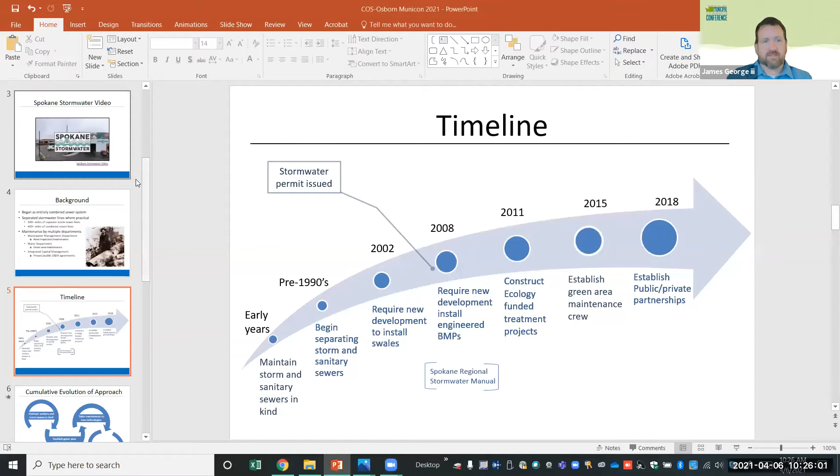So today's presentation, as Karen mentioned, is the organic evolution of a multi-departmental municipal O&M program. And I'm going to present a couple videos and a little PowerPoint sandwich in between the videos. And then as part of that PowerPoint sandwich, Taylor Hoffman-Ballard is going to present some work she's doing for the City of Spokane. It kind of ties it all together.

And so this is a lot of words for a short presentation that just wants to showcase where our municipal O&M program is at and how we got there. Because I think we're a little atypical in the municipal O&M program world. We kind of grew organically, in response to needs. That's how our program got developed.

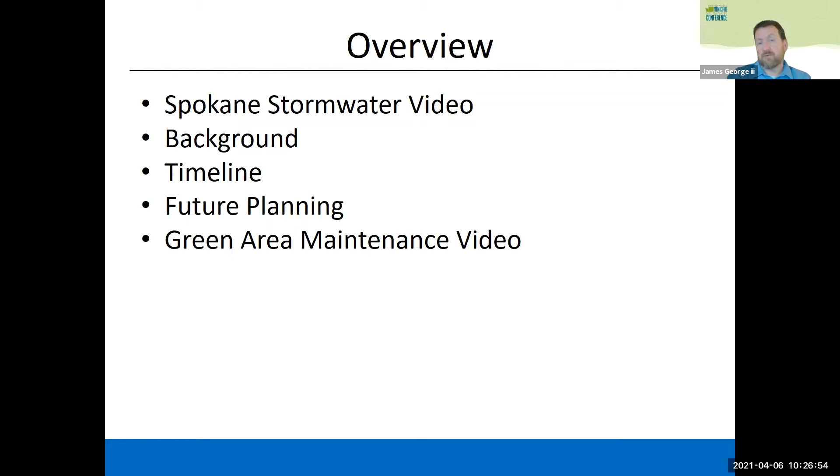As mentioned, we're going to have a video, a few very brief slides, and then another video. These videos were created as part of our public outreach campaign, but they do showcase our maintenance program pretty well in that they make our public aware of what we do and why we're doing it. So with that, we're going to start with a video right off the bat, and I'll see you guys when it's wrapped up.

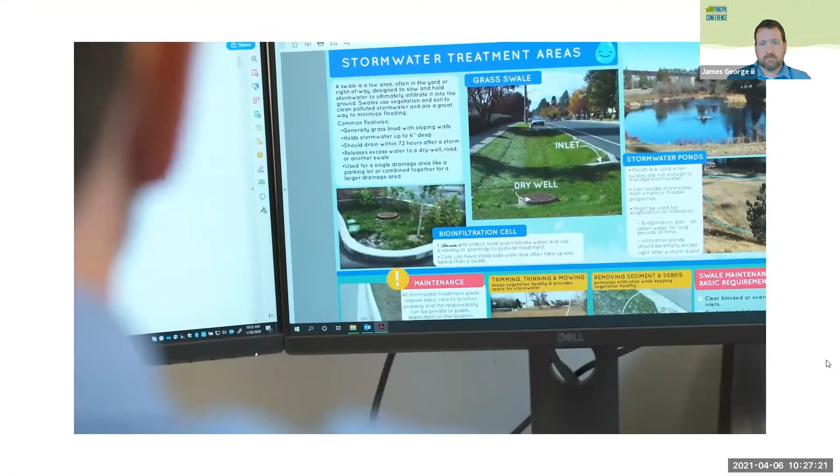We are responsible for all the wastewater, so that's the combined sewer system, the sanitary sewer system, and the stormwater system as well. The folks that work in the department here make sure that a packet of water, when it leaves the sky and hits the ground, is managed appropriately, and then it gets to the river as clean as possible. That's what this department does. We try to keep as many of the pollutants out as we can.

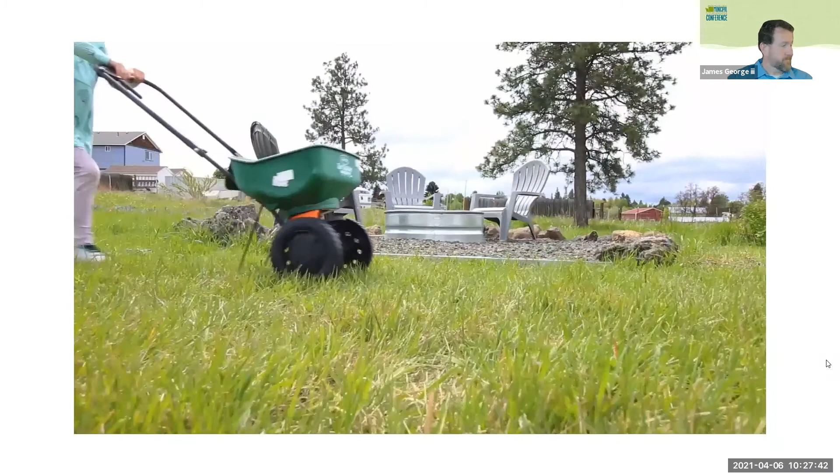Typical pollutants in an urban environment are things like metals that come off of worn tires and worn brakes, fuels, oils that are leaked from vehicles, pet waste, lawn chemicals like fertilizers or pesticides. Well, that stormwater comes by and it picks those things up and takes them with it. Anything that doesn't fall out of the sky is considered a pollutant.

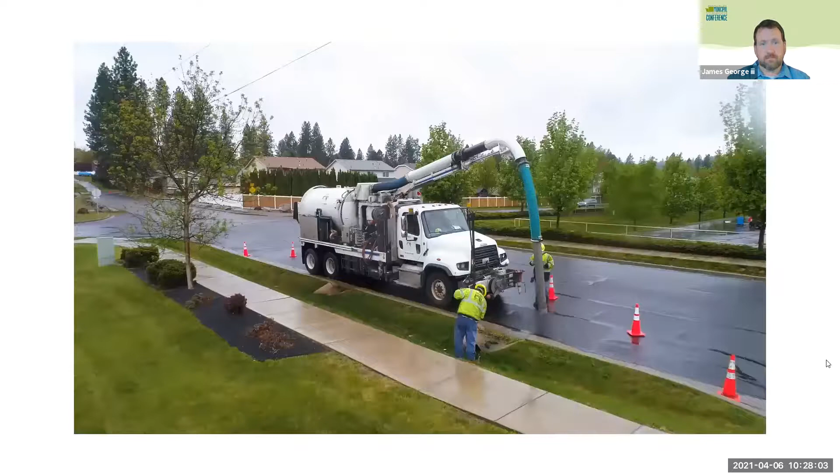And a lot of people don't realize that our aquifer in some places is only 28 feet deep. And that goes to the river. Well, the river interchanges with the aquifer at least 7 times. We're out doing what we're doing so it can help keep the river clean. I do think it's a very big and very important thing that we do day in and day out. And most people don't think about how well we protect the system.

Our stormwater system consists of 3 different elements. A combined system where they take the stormwater and mix it with the sewage, and so you see catch basins in the street. The separated storm system is one in which we have pipes that go to the river directly, and those have catch basins and grates and pipes. Then you have on-site, which is dry wells and grassy swales.

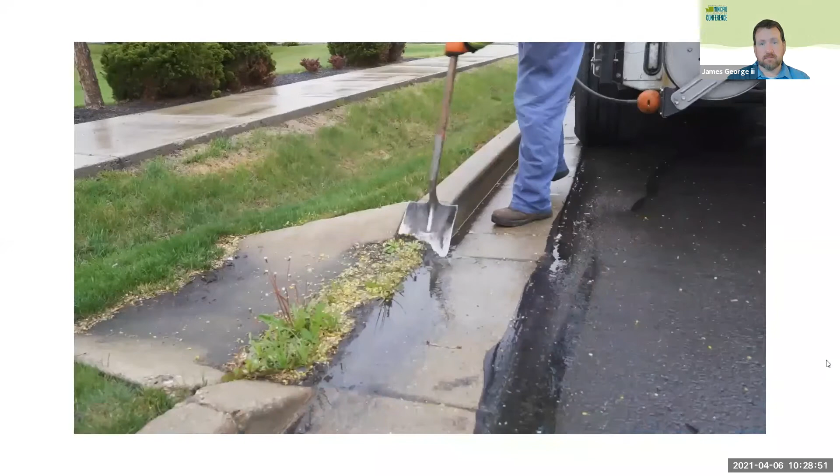A swale is a low-lying area. It's essentially a ditch that works for us. You can find them all over town. It allows stormwater to drain into it, and then the vegetation and the soil in the swale provide treatment for the stormwater to remove the phosphates, the metals, the oils and greases.

What is awesome about stormwater chemistry is that Mother Nature provided us the tools we need to treat stormwater. Vegetation and grasses and bushes and such, as well as the soil, the microbes in the soil and the soil itself, provide us the treatment that we need to remove the pollutants from stormwater.

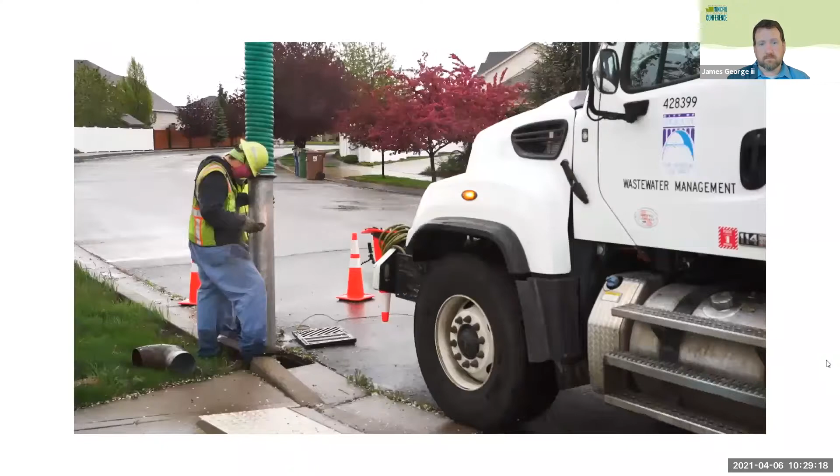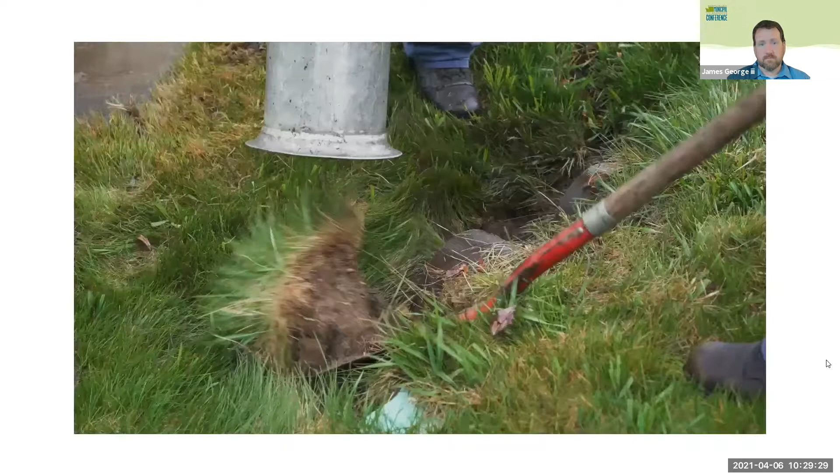We have just under 20,000 catch basins and dry wells within the system, within the city limits, that we're maintaining on a daily basis. The catch basins basically take the stormwater and put it in pipes that go either to the wastewater department, or a lot of them just go into the ground. On a normal day, we go out, we check to see what catch basins need to be cleaned. We check the depth of the debris.

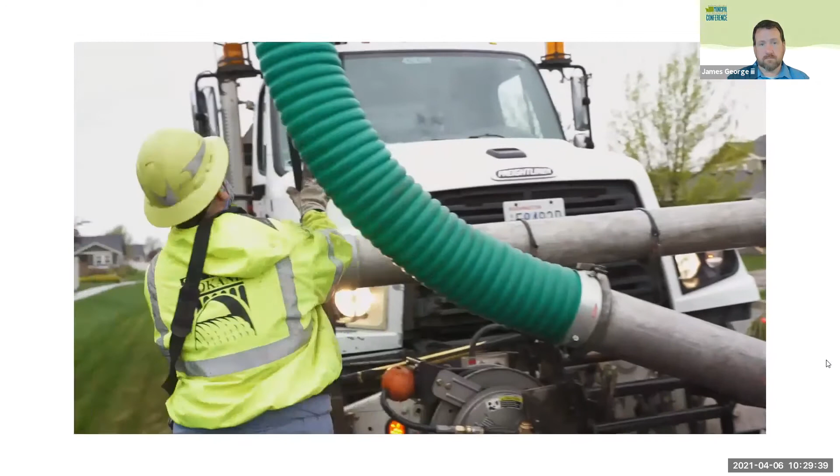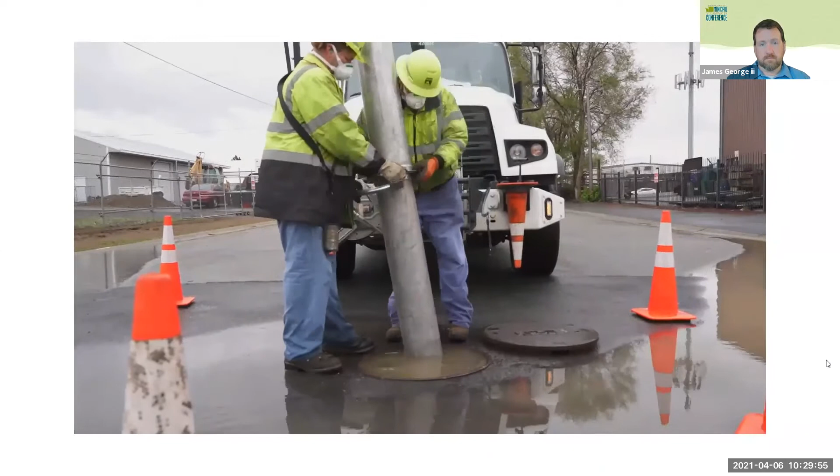One of us will operate the boom and suck the debris out. The other will use a jetter gun and spray out the sides, clean out the inlet pipe and the area around the catch basin, and make sure it looks better than when we got there. And then when there are storms, we go help out where the infrastructure isn't quite keeping up.

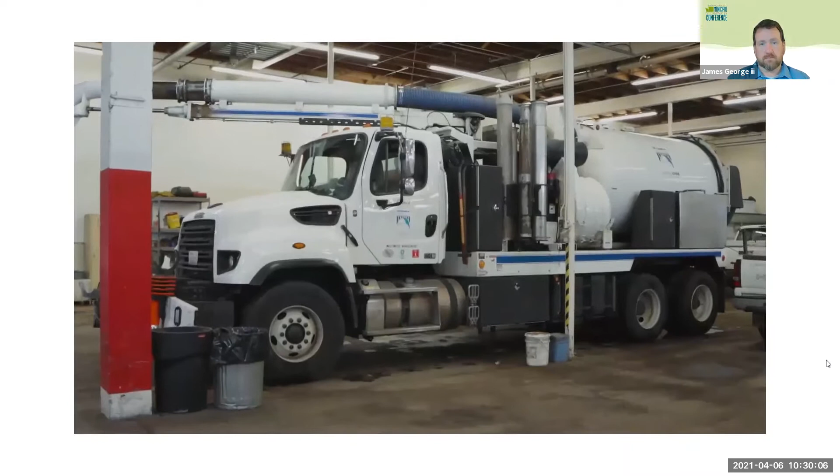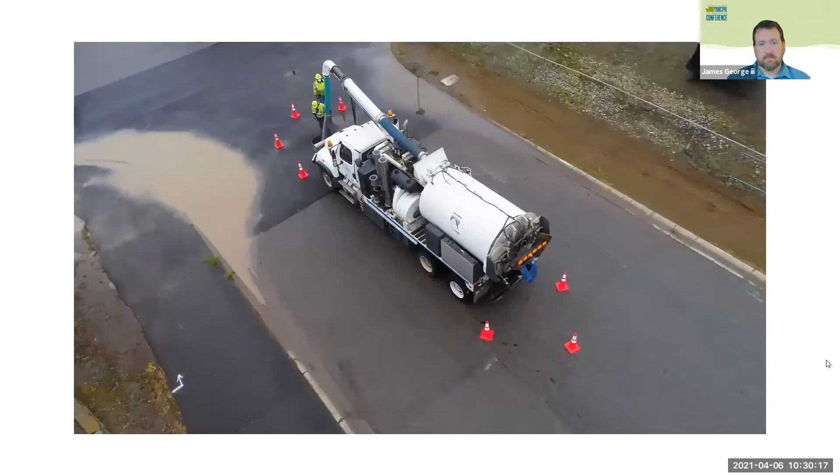That's when we get puddles that we have to go take care of, especially in the spring when the ground's frozen. Truck will hold about 2,200 gallons of water, and it'll fill up in about 4 minutes. Mother Nature rains too much, our pipes can't handle it. And we always get the question, why don't you just make them bigger? And then Mother Nature proves who's in charge, and they're still too small.

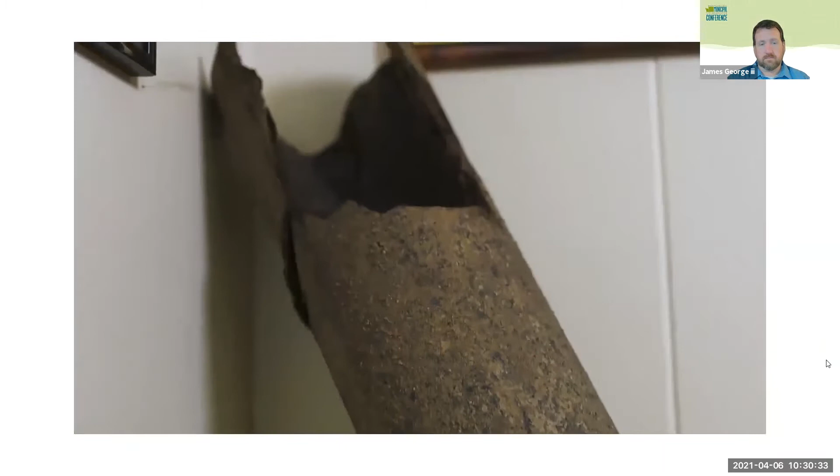We have over 850 miles of pipe on the sanitary side, and we have 350 miles worth of storm pipe systems. Pipes that are over 100 years old, some of them show signs of duress, and so we plan on what we're going to do to fix those. Come on.

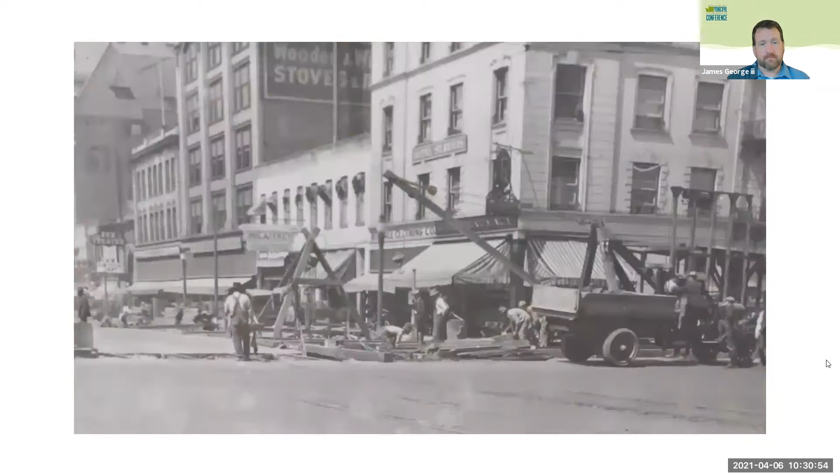My name is Mike Simmons, and I work for the city's wastewater division. I've worked for this department for almost 40 years. 30 years of that, I've operated a television van, video inspection system for inspecting pipes. In 1957, Spokane had a catastrophic failure of a sewer in an expensive neighborhood, and it cost over $2 million in the 50s to repair in 2 years.

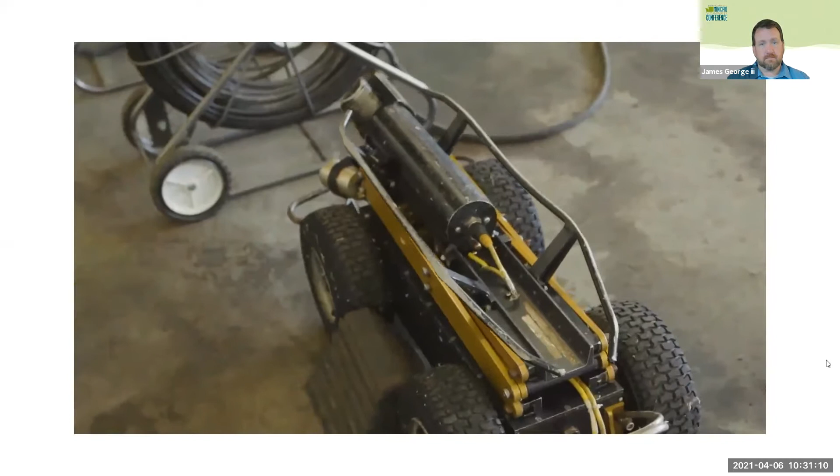So the City of Spokane began to look at ways of inspecting our pipes and knowing what we had in advance. The operation consists of introducing a camera into the sewer manhole and driving it through the pipe, watching it on television and observing the condition of it, logging observations, faults, roots, cracks, anything that might be in there, and making a full report of it in a video.

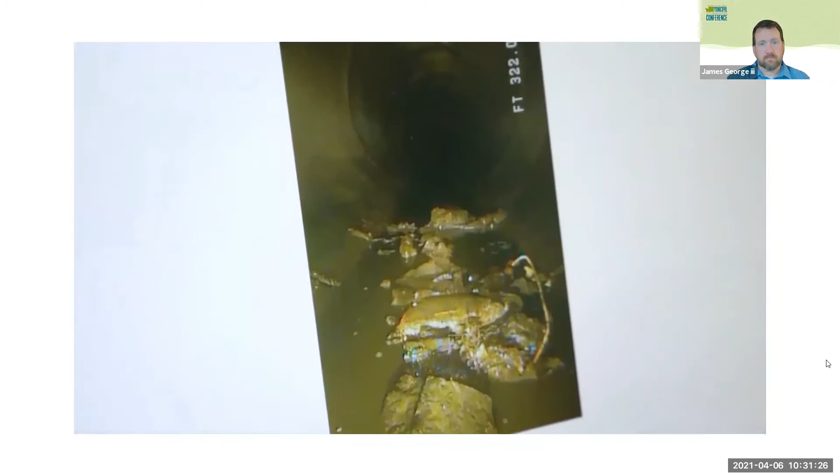These are some snapshots of some of the different pipe conditions that we've encountered over the years. This would be considered crushed pipe, almost a failure actually. We don't want them to get to this point. So the money that is spent on it is saved dozens of times over.

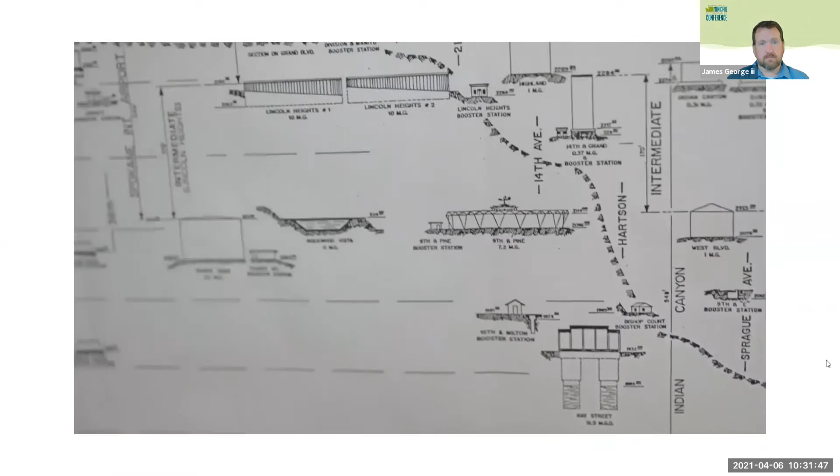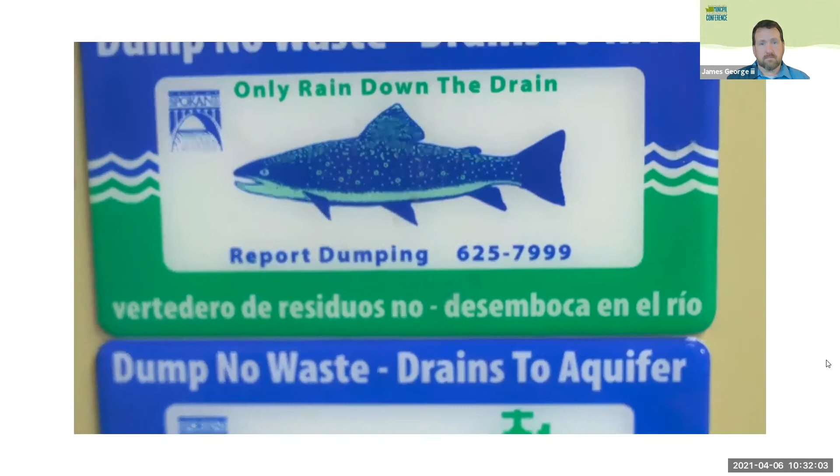Day to day, it's a variety of stuff. We go out and look at new construction, looking at the dry wells, infiltration gallery, piping. We also deal with illicit discharges. People pour oil and stuff into the basins, where we go and check that kind of stuff out and see if we can find out who did it. It all lands in the river and then ultimately in the oceans. We need to do better globally about source control, minimizing the pollutants that are available for the stormwater to pick up.

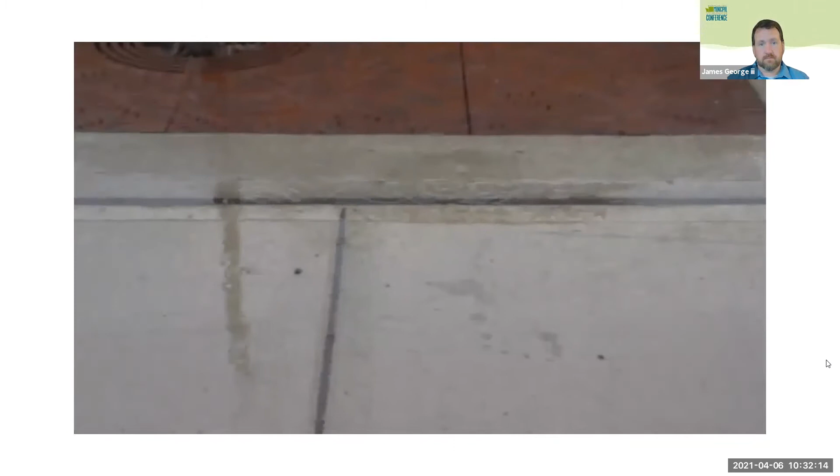What we want you to realize is you can do your part. If I spill, accidentally, I drop a quart of oil or something really bad, then I'm good at picking it up, cleaning it up. You can take your paint and all that hazardous waste to the recycle place. It's free, it doesn't cost anything, just a few minutes of your time. Drop it off and dispose of it in the correct manner. Keep our river clean. We should embrace that a little bit and help clean that water so that we can protect that river.

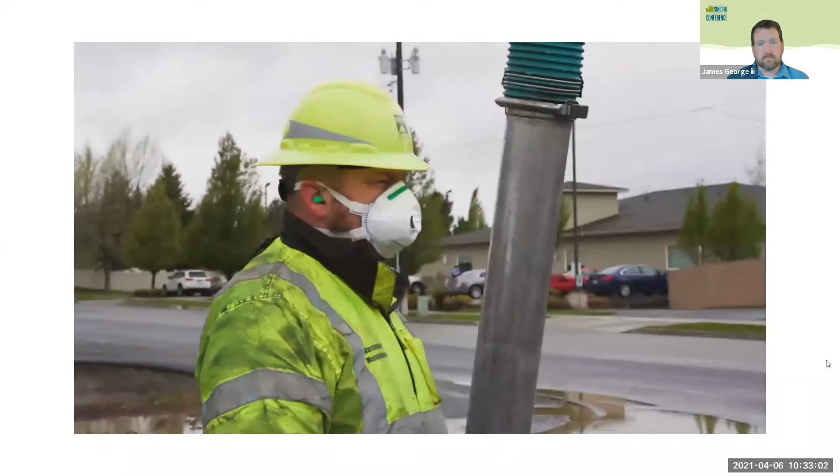We are blessed with and cursed with an aquifer. Blessed with it because it's the purest, greatest water in probably the nation, I think, but cursed with it in that we have to be great stewards of it. There's a thought that you can't do much by doing one thing, but if a lot of people do one thing, they can accomplish great things. And so everything that we do in stormwater is to try to be good stewards of not only the water that falls out of the sky, but the water that gets into what we drink.

Okay, so that was our video. That's who we are, that's what we do. And where we began is entirely as a combined sewer system, like many cities out west. Everything went to pipes, went to the river. And then pre-1990s and the early 80s, they started separating the storm lines from the sewer lines. We have separated over 300 miles of storm lines, but we still have over 400 miles of combined sewer and sewer lines. So it's still a part of how we operate here in the city of Spokane.

And it's just because there are a lot of areas of town that aren't conducive to managing stormwater through infiltration, and it's just not practical. And so our maintenance has kind of been divvied up in response to the needs required by permit, but also just by being environmental stewards. We don't have a single stormwater utility department. We do have a stormwater utility bill, but our stormwater responsibilities are spread out across multiple departments in the city.

Specifically maintenance, it's our wastewater management department that maintains the infrastructure such as the pipes and the catch basins, and they've grown to absorb the swales, but they do the infrastructure, they don't do the landscaping. That's our water department. So a swale might be visited by two departments or more, and sometimes private consultants or private entities. A single swale can be visited by many entities to have its maintenance performed.

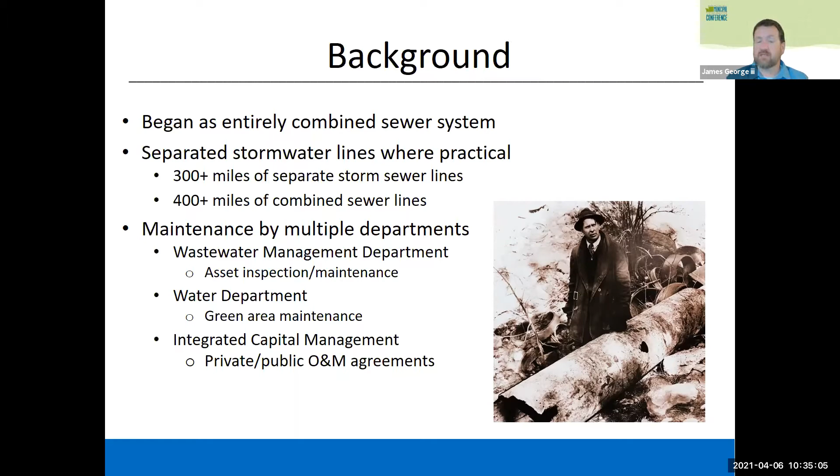And our integrated capital, they don't do maintenance. They do lots and lots of things. They manage capital for one, but they do initiate these public-private agreements, which a lot of the nation's headed that way, and we've got a couple agreements in place now, and we're always looking for more as we move forward because it's lucrative. So in short, our maintenance is divvied up across multiple departments with multiple responsibilities focused on what their expertise is, rather than having a single utility be responsible for all the maintenance of our stormwater assets.

And just to show you a quick timeline, or a long timeline in short view, back in the day, we maintained storm and sanitary sewers in kind, pipes for pipes. We began separating them before the 90s and the 80s. We continue to do that when practical. About 2002, the city started requiring development to install swales. I believe that to be more of a flood control prerogative rather than stormwater treatment.

But in 2008, here you see, we started requiring development to install engineered BMPs, which are still swales, but now they're engineered BMP swales. And if you see about 2008, our stormwater permit was issued prior to that, which drove that, I'm sure. And then we also have a Spokane Regional Stormwater Manual, which has an equivalency to the Stormwater Management Manual of Eastern Washington that Ecology publishes.

About 2011, the city, maybe a little prior, started to construct Ecology-funded treatment projects. And this is where some pretty grand treatment infrastructure in the city started to be built. Some of my favorite things to go look at. And we'll see some in the video, and we just saw a couple in that video. Larger BMPs, not just roadside swales, but still functioning the same as a swale, just on a grander scale, accepting more of a basin size footprint for treatment.

And so that changes the maintenance a little bit according to what the treatment is that you're doing. It's not simply having a lawn crew go out there and mow it. Sometimes it is that. It depends on what the treatment is, especially as these emergent technologies come out. Silva Cells is still a sensitive word in my department. I'll just tell you right now. We've learned to embrace it, but Silva Cells aren't pipes, and we were pipe people. So we've grown as maintenance needs have grown.

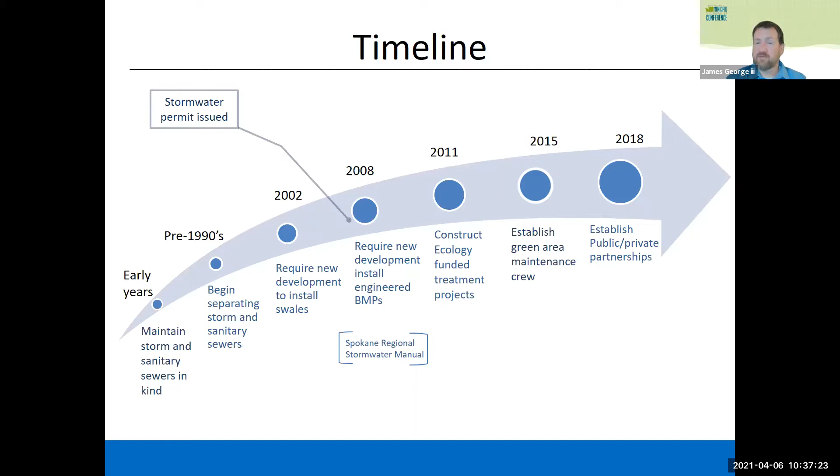And then in about 2018, maybe a little earlier, but continuing on, we started to see public-private partnerships established with the city and private entities, such as our Sharp Avenue Permeable Pavement Study, which is an effectiveness study, and then Kendall Yards, which we'll see in the last video, is a public-private partnership that works pretty well.

And so this is a little cumulative evolution of approach. These are kind of the triggers and the responses. And it's cumulative, meaning that each one of these steps does not replace the previous. It's additive. So the mindset was a sewer is a sewer is a sewer. The response was maintain sanitary sewer and storm sewers in kind. And then evolution over time, pipes and vegetation, they do have different needs. So we responded with establish a green area maintenance crew.

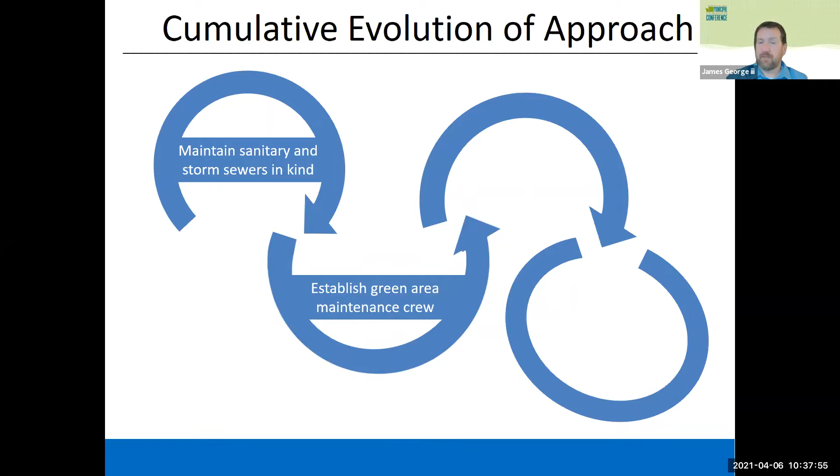And then treatment facilities are not created equally. Silva Cells are not catch basins, and they are not permeable pavement. So tailor your maintenance to new technologies, which is sometimes a cultural shift, more so than just adopting the technology. The bigger hurdle is changing culture and doing the training and getting acceptance.

And then we realized some of our projects more recently, we need to resource with an attention to aesthetics, not just have it function, which is ultimately the most important thing. But if it's going to be in public or on private property that's shared, aesthetics does become important. And so public-private partnerships, because the private sector is geared towards aesthetics more so than public stormwater treatment, but they can be married and they can be the same thing.

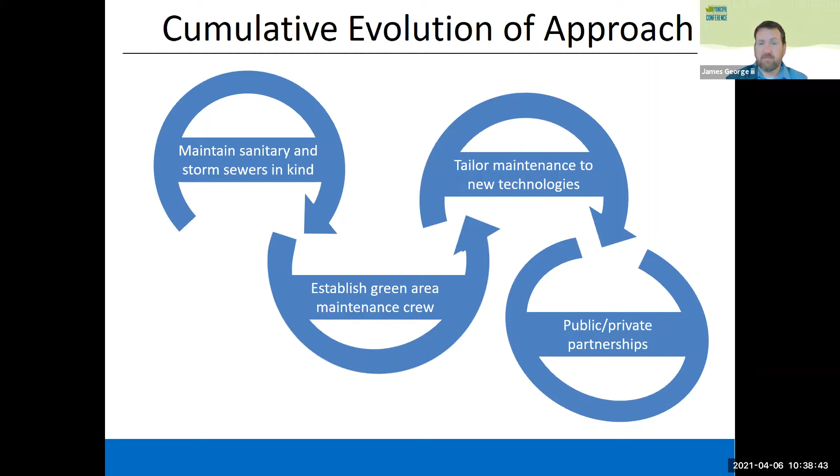And with that said, I'm going to kick it to Taylor and let her take it. I'm going to control the slides at her direction. Sure. All right. Thanks, Trey.

So what we did was we came up with an estimate of operation and maintenance labor and costs for the infrastructure that we were proposing in this 15 square mile area. And that estimate included labor and costs for the pipes and structures, the swales, the lift stations, and regional facilities that were proposed in this area. And that estimate was come up with a lot of help from City of Spokane and other stakeholders in terms of what they know about maintaining pipes and structures and swales.

We also took past reports that were done for the city and used that information as well to inform our estimate. And then we also used literature on the subject. And that estimate was put into terms of full-time employees, so they could kind of plan for the infrastructure that's going to potentially be proposed in this area, as well as dollar amounts. Next slide.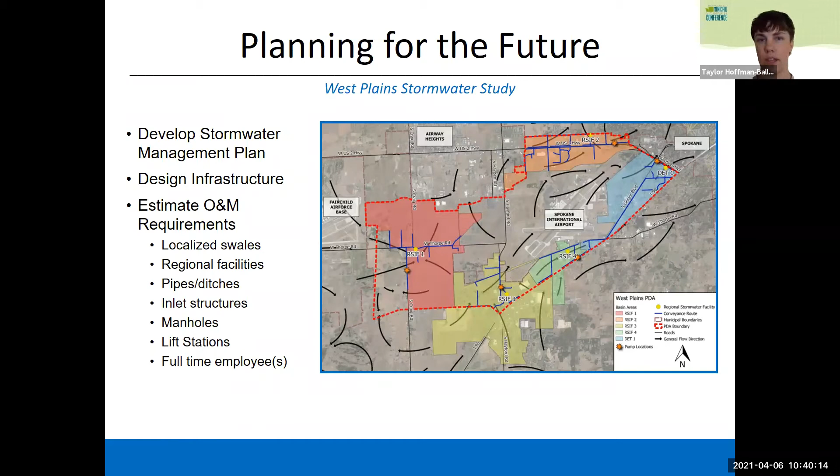And this might seem like a lot of work for a planning level study, but there are some great benefits to planning ahead. Like I mentioned, we got City of Spokane and other stakeholders input on operation maintenance of some of the infrastructure in the area. And this allows us to come up with more accurate estimates of what we would expect to see in terms of labor and costs in the future in this area. So you can make that more accurate early on and maybe identify funding sources. That also allows us to consider maintenance in our design.

As we move from planning level to design, we can understand what design best fits the labor, the equipment, and the knowledge base that City of Spokane has, so we can make that trade-off successful. We also get stakeholder investment early on by involving City of Spokane and other stakeholders. By getting their input early on, we can identify any issues up front and limit any identification later on in the study closer to design.

And lastly, by planning ahead, we can come up with some creative solutions and identify potential shared space. So for example, our regional facilities, which would receive water from like a basin scale, could serve as a treatment facility. They could also provide maintenance access, and they would also provide much needed green space for the West Plains area. So with that, we're wrapping up the planning phase of the West Plains Stormwater Study. We're excited to continue working with the study as we move into design and hopefully get to see some of these really cool facilities and infrastructure get built and maintained. And then I'll hand it off to Trey.

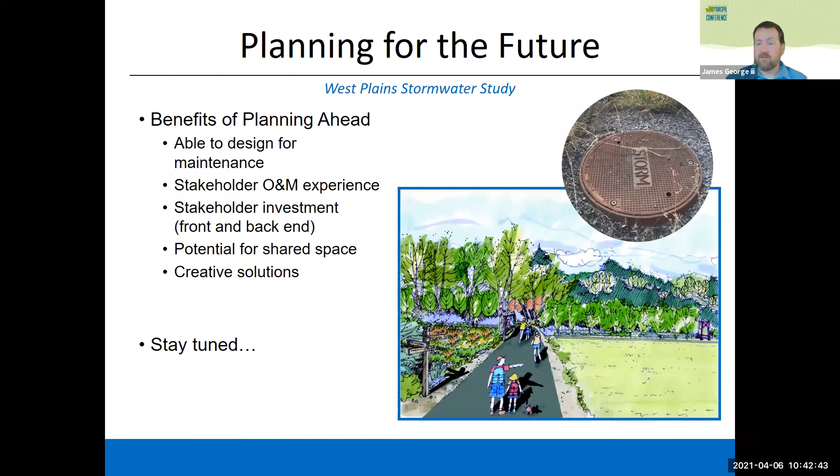And these become really important when you do have these creative solutions with potential shared spaces, because you have more than pipes, and you have more than lawns. And you have different expertise that's needed, different skill sets that are needed to fully maintain the entire integrated piece of property. So it's been really good working with Osborn to get to this point.

And so after this, we're going to watch another video, and then I think we'll have a couple minutes for questions, and I'll let the moderator drive that. So we have one more video for you. It's a short one like the previous, and this is focusing on green area maintenance, and we get to see Taylor make an appearance for us. She's heavy in the video. Hang on one second, please.

So stormwater is Mother Nature at its best. As the rain comes, it picks up all those pollutants and carries them into some kind of stormwater area. If we maintain these things, they will last longer. They're the ones really doing the work for us. So as long as we take care of them, they'll take care of us. It's keeping that runoff from entering our storm system and ending up in the Spokane River or in the aquifer. That's really why we want to have these treatment areas and why we want to keep them functioning, to protect those. We have all of our different sites around the city that we manage.

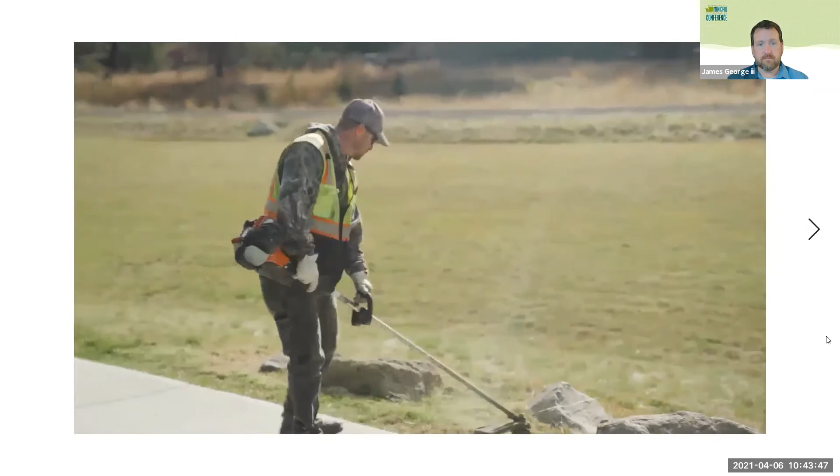Major concern is like flooding, getting rid of excess stormwater or drain water. We also get rid of a lot of the trash that's put into these that's usually flowed from the water. We're looking for trash, garbage, leaves, weeds. Make sure the water can flow on the edges and the outlets. Don't flood the corners. So we're gonna make it look better and work the way it's supposed to at the same time. I think it's really important that everybody comes in together to make sure that we're keeping the aquifer as clean as possible and keeping the Spokane River as clean as possible. I mean, it's a recreational asset. It's an important piece of the city of Spokane.

From the time of design, we are thinking about operation and maintenance and how this stormwater treatment area is going to be designed, but we also want to lay out an operation and maintenance plan for this stormwater treatment area that can be passed on. As the city grows, you have more stormwater treatment facilities. As the regulations grow, you have more requirements on your stormwater treatment facilities, and so you need to project moving forward what your staffing and equipment needs are going to be.

I think the most important thing that we've learned is really just talking about these projects. We want to make sure that we're not setting our maintenance crews up for failure by making something that's too small or too difficult for them to maintain. When we plan and design a stormwater facility, we want to make sure that we're meeting the water quality goals, the water quantity goals, and we want to design something that's cost effective too.

The public-private partnerships are incredibly helpful to us because a lot of times they allow us to achieve our water quality and quantity goals without spending more money than we would otherwise. I'd use the example of the Olmsted Brothers Green facility that we did at Kendall Yards. This is a facility that essentially begins over on the Monroe Street Bridge just to our east here.

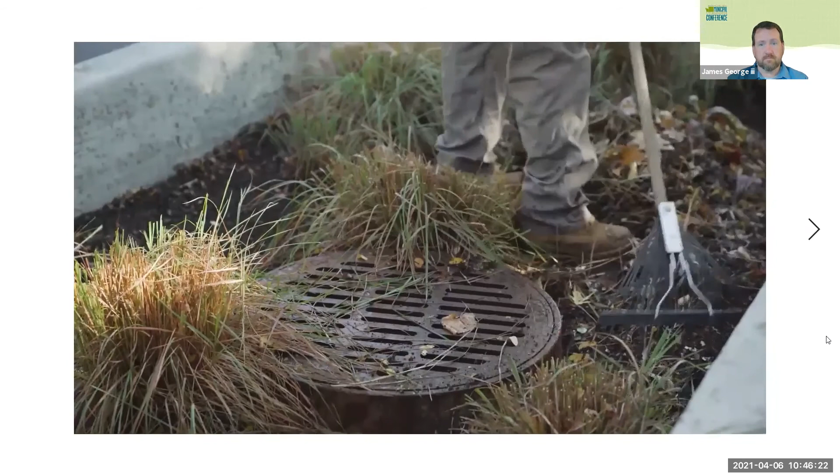Another challenge we're finding is just quantifying operation and maintenance over a long-term period, so that we have a representation of what it might take to clean out a catch basin or mow a swale, and those numbers even vary depending on where the BMP is located. So if it's on a main thoroughfare and you want it to look extra nice, that's going to take more work than say just a swale in someone's parking lot.

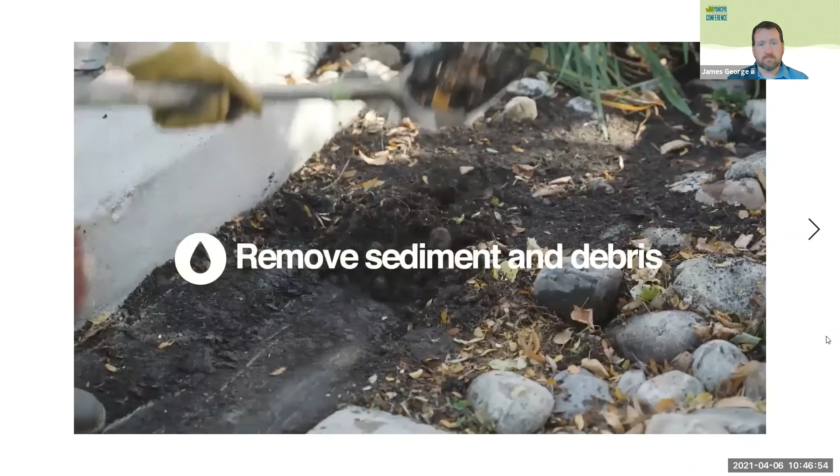There's going to be some pretty common maintenance actions that you could do regardless of what the stormwater treatment area type is. The main one is just making sure that the inlet and outlet structures are clean. So removing any sediment or material like trash, leaves, whatever, that's keeping water from entering those. Items that might require more frequent maintenance are trimming, removing any noxious weeds, and mowing or thinning any vegetation that's in the stormwater treatment areas. Those tasks are important to keep things looking nice, as well as vegetation healthy.

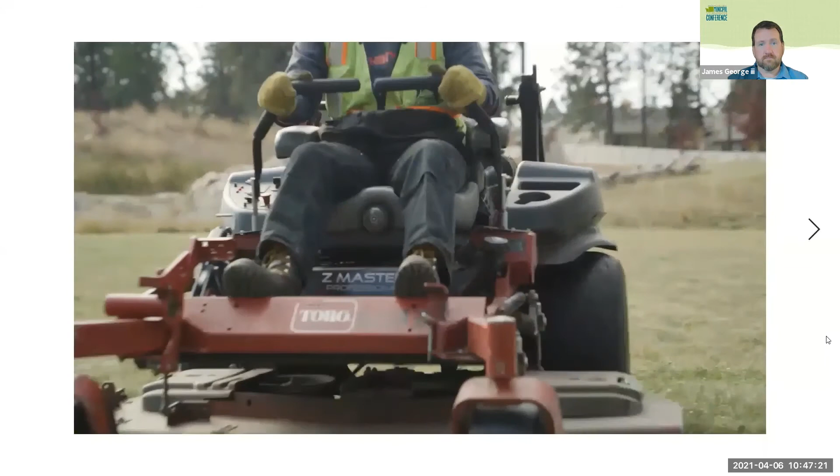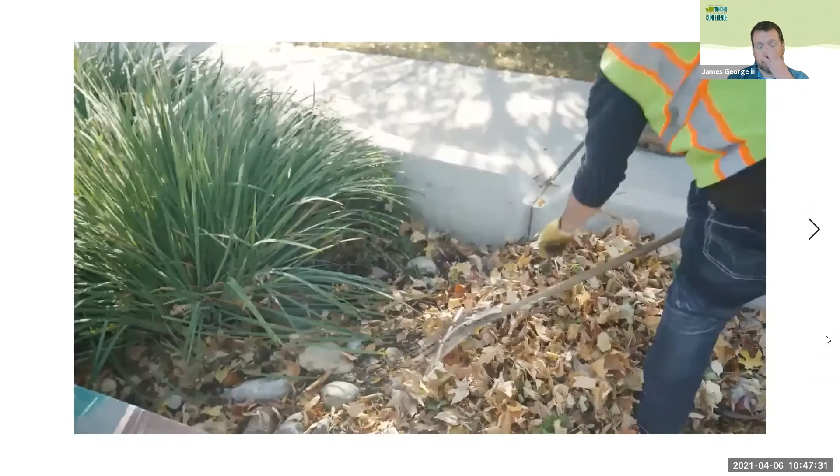Our crews will go out and they'll do the weeding, the mowing, make sure the irrigation system's working properly if it's a grassed facility, clean inlets, make sure grass isn't dying, make sure things aren't plugged with trash. We've got a great bunch of maintenance people here to help clean these facilities, mow these facilities, and try to take care of them. I can't even give you a number of how many miles of green area that we are maintaining. And everybody takes such great pride in what they're doing, and they do such a great job. I'm proud to be in charge of these guys. They're great.

What I like about this job is I live here. You go around, you see a lot of clear spots. I did that and that makes me proud. This is my town. I want it to look good. It's pretty cool to see the impact that you're making on the town, to be able to see your work actually come into effect in your life.

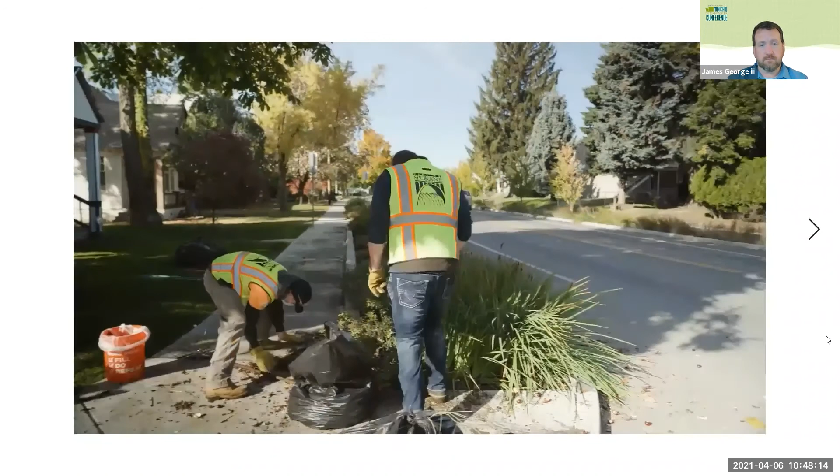I think it's really important for everybody to be involved in this. It is in everybody's best interest to maintain these facilities, whether it's a city or a private homeowner or a developer even. We put these things in place so that we can save both the aquifer and the river, and I think it's really important.

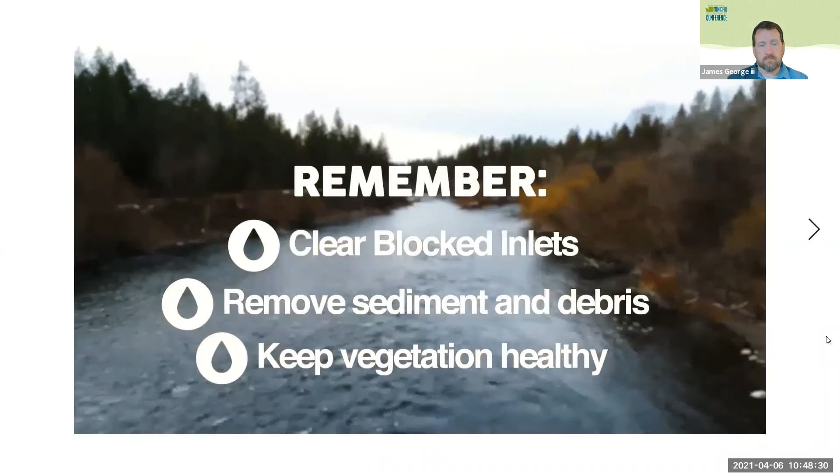There's a lot of really good ideas coming from municipalities who are just figuring this out, a lot of hard work, knowing the amount of research that's going into this, knowing the amount of talking that's going into this. This is something that I'm confident we can learn more about and that we can figure out a good solution or many good solutions to provide operation and maintenance for our stormwater treatment areas. We got this.

And with that, that is our presentation.